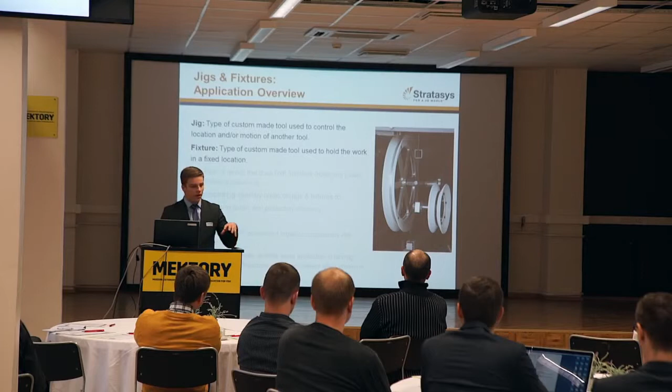So first of all, what is a jig? It's basically a tool that is used to fixate an object on a production line or on a workbench, where a worker or a machine can work on this particular item. It can also be a fixture that holds a product while it's traveling along the production line or while it's being transported from one workshop to another, or from one workstation to another.

Basically, all manufacturing industry relies on some sort of jig and fixture. A pallet, a wooden pallet, is also a fixture of sorts that helps you transport tools from one place in the production to another.

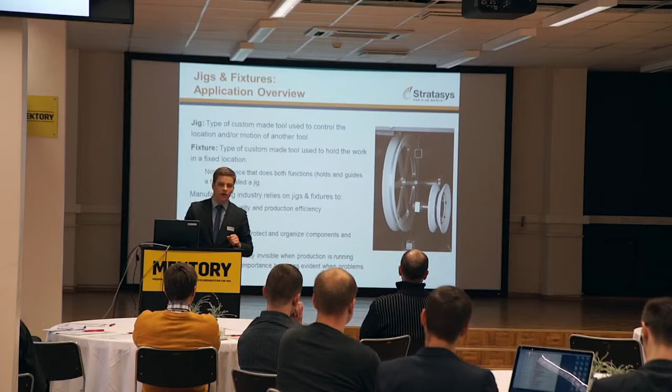As it says here at the bottom, these tools are basically invisible in the production line because they're complementary tools. Rather than being manufactured, they're oftentimes made by hand, or they're heavy machinery outsourced from the company. You buy ready-made tools, which often limits you to a certain application of this exact jig or fixture.

These kinds of fixtures include assembly aids, alignment fixtures, holding and nesting fixtures. A lot of these printed fixtures are used for inspection, and not only for measuring inspection, but also for environmental testing.

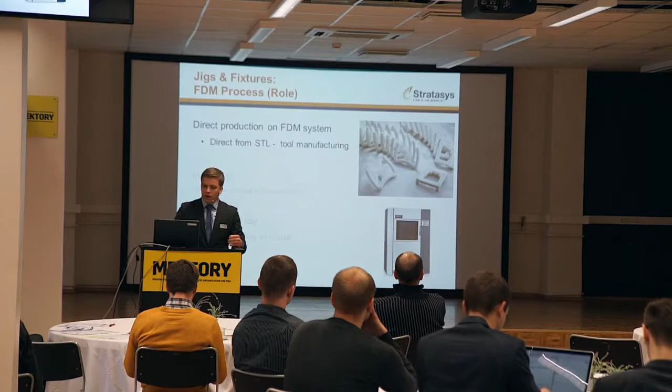Jigs and fixtures are mostly, on our client side, printed by FDM systems. FDM systems use thermoplastics, or strings of thermoplastic, which they melt and build up the product. And we have a lot of different material applications that you can use there.

We can start with the simplest ABS plastic, which would also be the cheapest for this sort of application. But in the meantime, we can also go for very specific materials. As I mentioned already, there's a material called ESD that doesn't allow static electricity to run through the jig, which is really helpful for most electronics producers.

So while you're running that hard drive down the production line, or that LED rig, you're actually not getting any static electricity. Additionally, there are jigs, tools, and fixtures that can be printed from materials like Ultem or polycarbonate that are really stiff, and can actually be stiffer and more resistant to wear than aluminium, for example. Many times these jigs are actually CNC'd out of aluminium just to save on money instead of CNCing them out of stainless steel, for example.

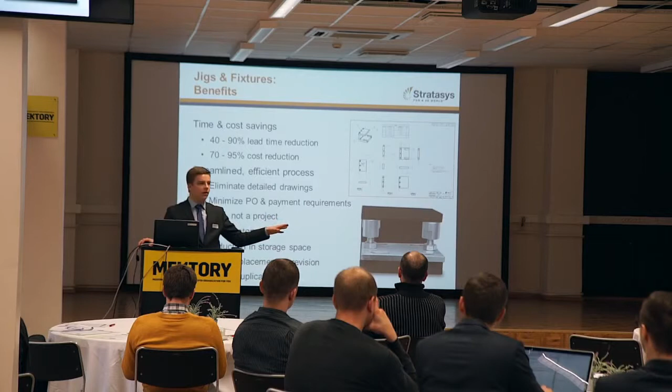So it doesn't require a lot of training to allow your factory workers to have a system sitting next to the production line. Whenever you have a need for a broken fixture or a tool, you can just push the print button, and within 5 or maybe more hours, or by the next morning, you already have the new tooling ready.

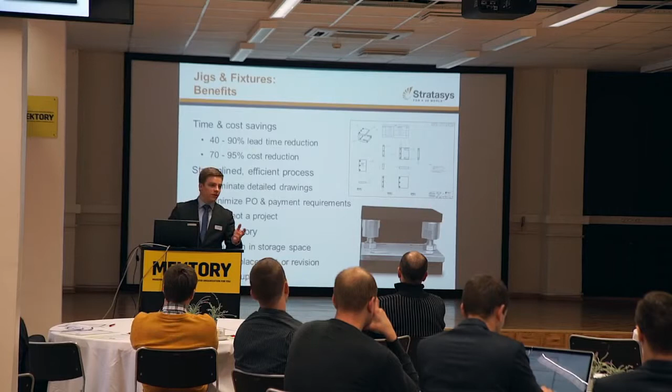And as mentioned before, there's the digital inventory aspect, so you can optimize your location and your premise space.

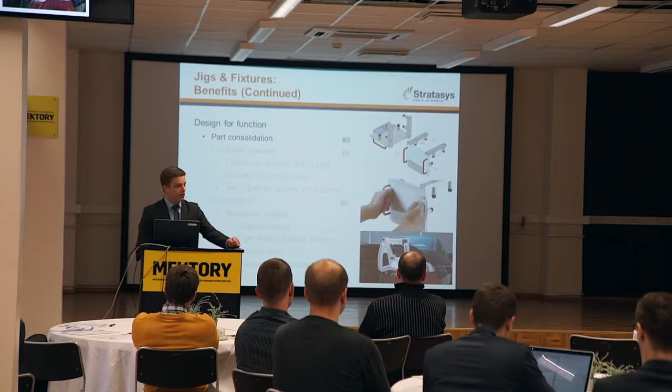On the picture at the top, you can actually see the old jig that was used to do this. You can try and count how many parts are there, but there are quite a lot. So one of the first things you can do with 3D printing, which is limitless in most cases, is consolidate a lot of those small parts.

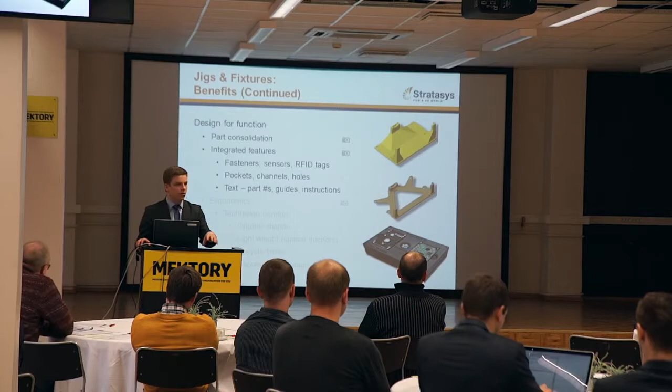You can also integrate features. For example, on the bottom part, you can see a hard disk drive rig that not only allows you to place two different parts on each side, but also has a small hole to put the screws in. This can actually be moved down the production line to the next workstation if needed.

You can very easily introduce text, labels, and signs into these kinds of jigs, which allows you to quickly convey information, especially when used for training new employees. You don't have to have anything else but a printed part on the table.

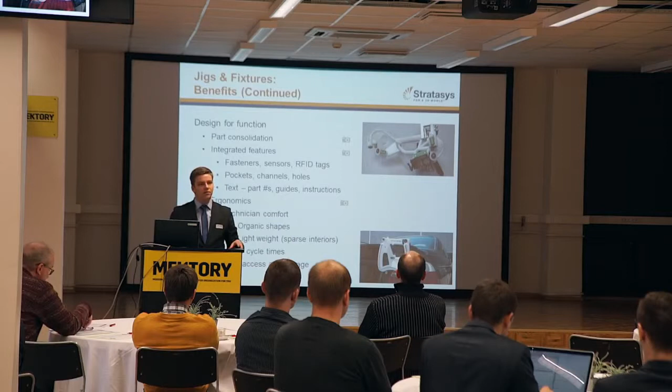And obviously ergonomics. As I told you, if you can go as far as customizing the tool for every worker you have, or if the worker wants, he maybe can customize his workbench by printing out a different fixture for his new tool set.

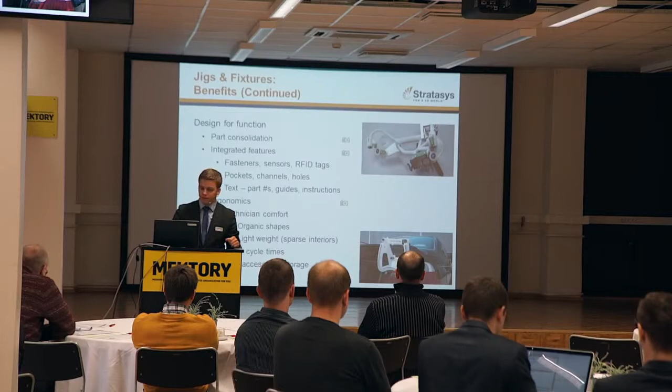I hope this video will run, and then we can actually show you one example of a company called Oreck, which is a company out of the United States that is using 3D printing machines to optimize their production. But not only production, also testing and also logistics.

They have previously used up to 20, 30 injection molded parts, which means that they have the injection mold sitting somewhere in an outsourced company, or sitting somewhere in their storage room, and whenever they would need it, they would actually bring it out and then use it, and it takes time. What is more, in case they change some of their products, if they come up with a new vacuum cleaner, they would probably need to make a new injection mold.

Instead, when having a 3D printer in-house, they can just do this specific print that they need, and they can quickly make new tooling. Meanwhile, if you have the 3D machine on hand while it's sitting and not printing tooling for you, you can use it to prototype. Because every 3D printer can be used in one sense or other for prototyping, more or less functional, but not every 3D printer can be used for industrial applications.

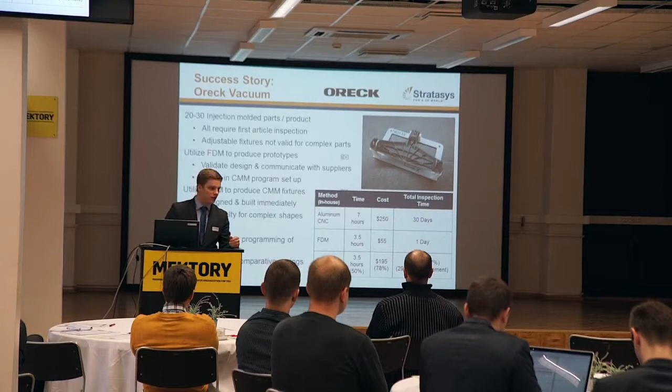So in comparison to aluminum CNC machine tooling, they are gaining almost half the time that they would be spending on CNCing it. They're gaining more than 70% in cost savings, and the inspection times they're getting out of the new tool are incredibly shorter. This is 30 days down to 1 day. I'll try and show you how they achieve this, if the video works.

Oreck manufactures the best vacuum cleaners in the world. We're the only manufacturer of vacuum cleaners in the United States, and we make the lightest weight, most powerful, simplest vacuum cleaners available. Stratasys systems here at Oreck helped improve our new product development and even some of our sustaining product capabilities.

One of the things we can do here is we do not have to do drafting, some of the radiuses and things and sharp corners that we might do in a new design. So we're able to create new parts very quickly and can test those parts from the design side.

I use FDM here to build fixtures to measure our parts for our uprights and for our products on the coordinate measuring machine. With traditional measuring methods, a lot of times we couldn't do any programming with the CMM to do first article inspection until the parts were actually made in the new mold. That could lead up to well over a month of bottleneck.